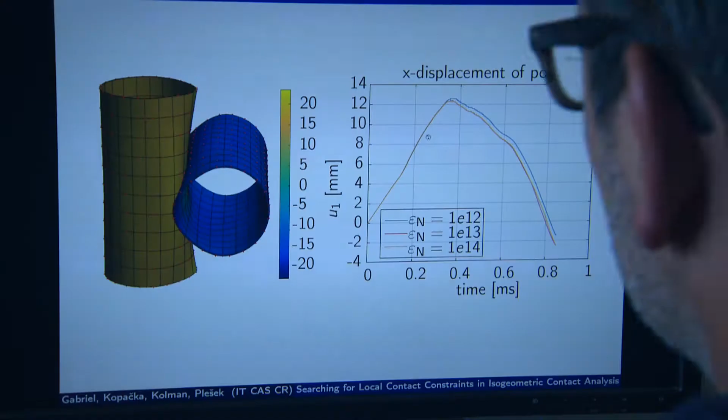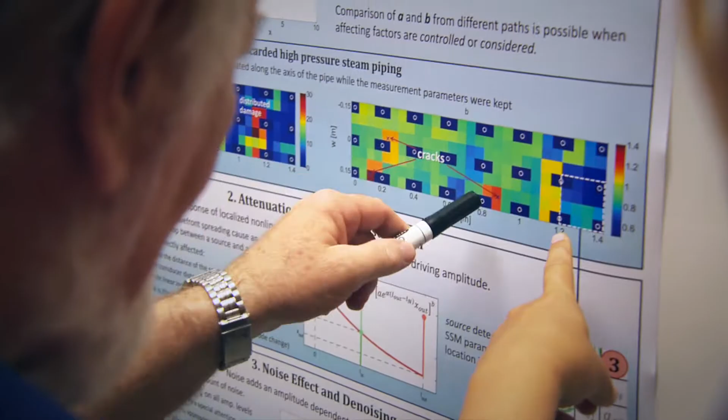The Department of Impact and Waves in Solids studies elastic waves in solids using theoretical, numerical, and experimental methods. Using new methods, we can diagnose materials and structures without damaging or dismantling them. Our aim is to detect the presence and propagation of material defects in time and to prevent failures.

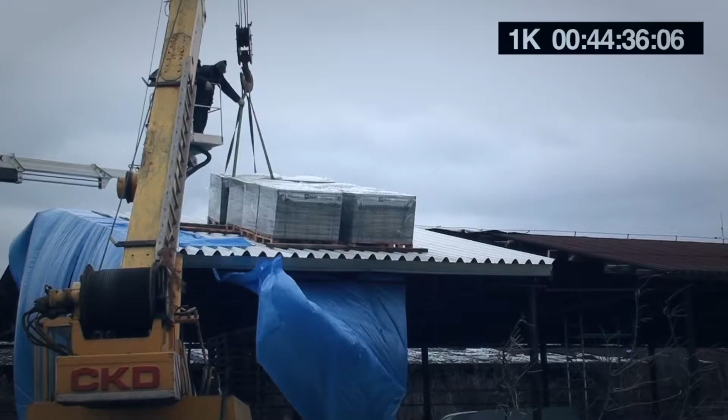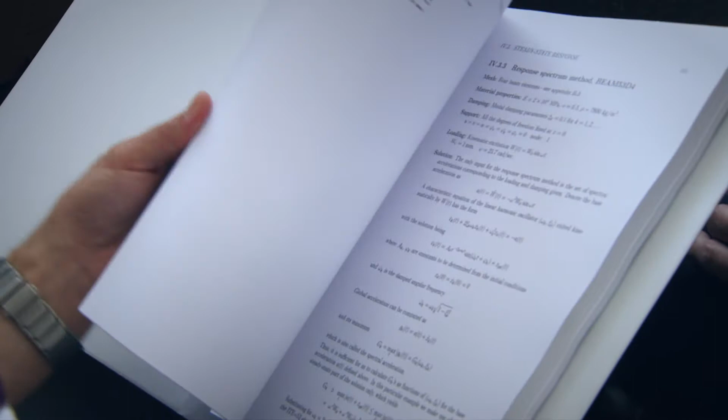The development, implementation and testing of the methods for computer simulation of processes in solids subjected to various types of mechanical or thermal loading are an integral part of our research methodology.

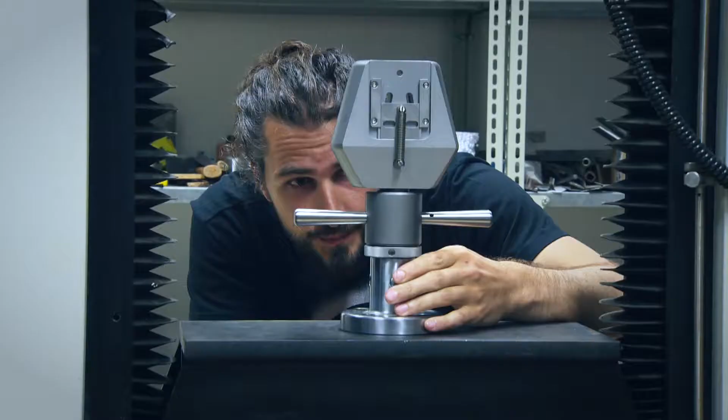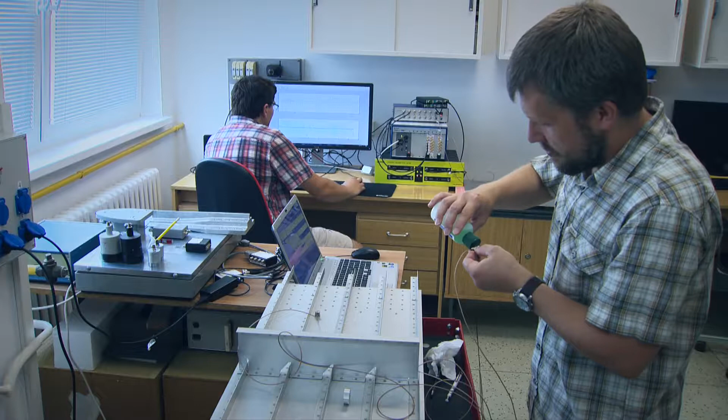Continuous monitoring of structures by the method of acoustic emission helps to detect the initiation and propagation of defects, such as material cracks and leaks from pipes, valves, storage vessels, and other structures. The ongoing damage can be located using piezoelectric sensors and principles of artificial intelligence.

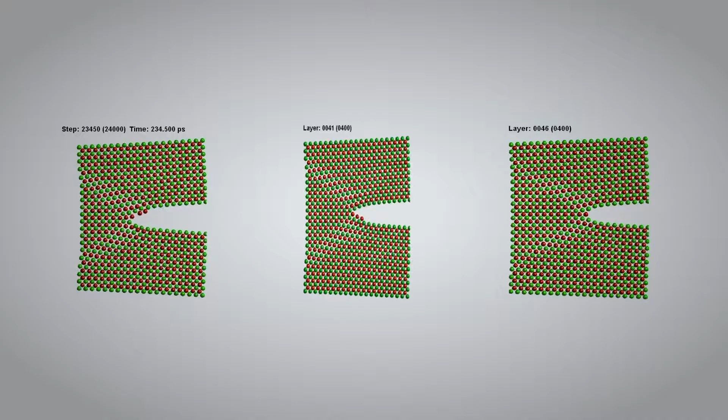Computational methods of molecular dynamics allow us to observe in detail the development of defects at the level of atoms and molecules and to predict the behavior of cracks.

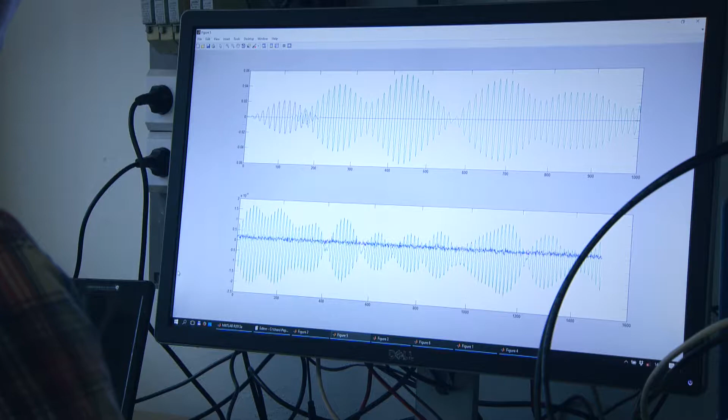The most recent methods of detecting hidden defects in materials include methods of non-linear ultrasound spectroscopy that are up to 1,000 times more sensitive than classical linear methods. The time reversal procedures open up new possibilities of detection of defects and reconstruction of signal sources.

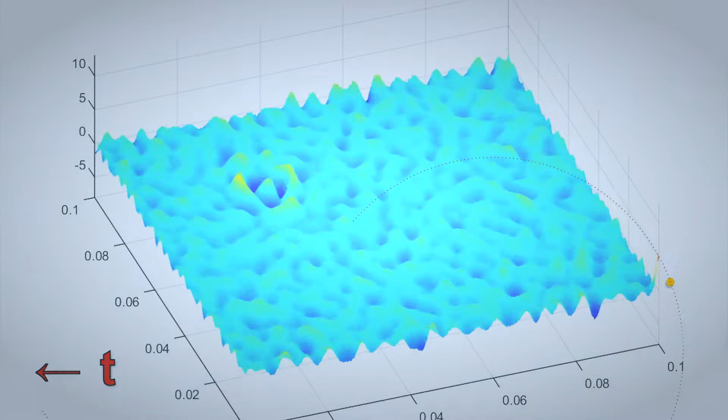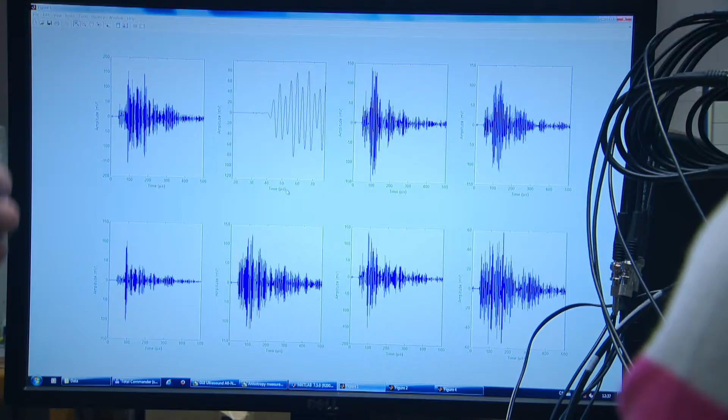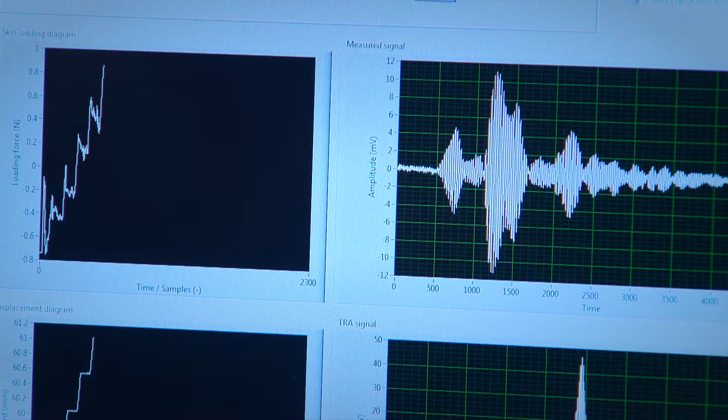We're developing an ultrasonic probe which will allow surgeons to instantly measure the main directions of stress in a particular skin tissue and therefore the most appropriate direction of the incision. Incorrect orientation of an incision can cause complications during healing. The ability of the skin to return to its original state after loading indicates its biological age or current health.

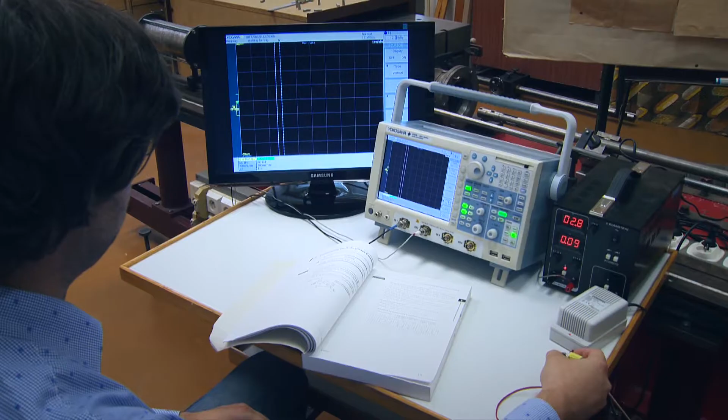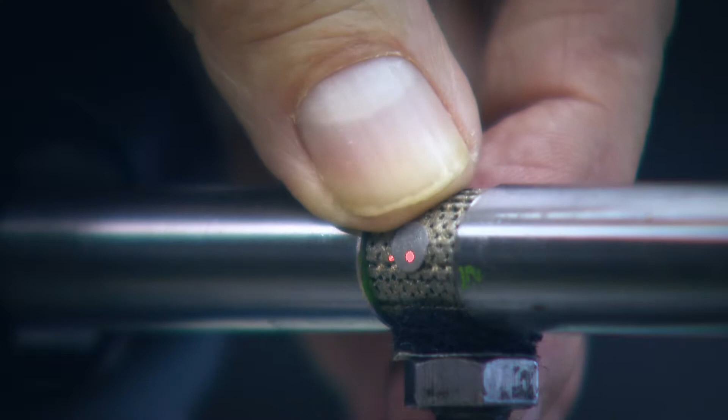The results of dynamic material tests help to shape the use of the materials in many industrial applications. An example may be the dynamic resistance of structural components or biological materials or food during transport.

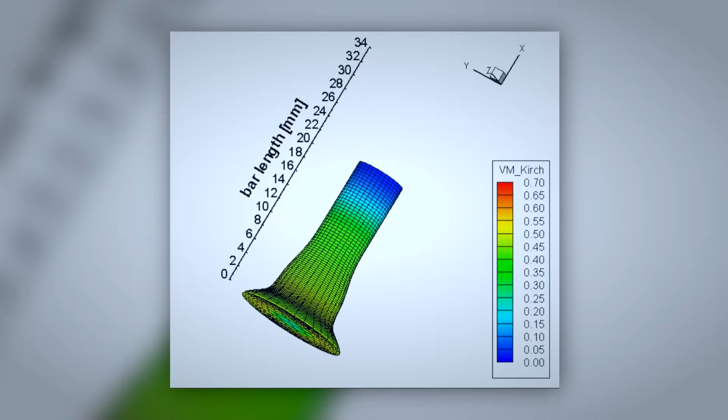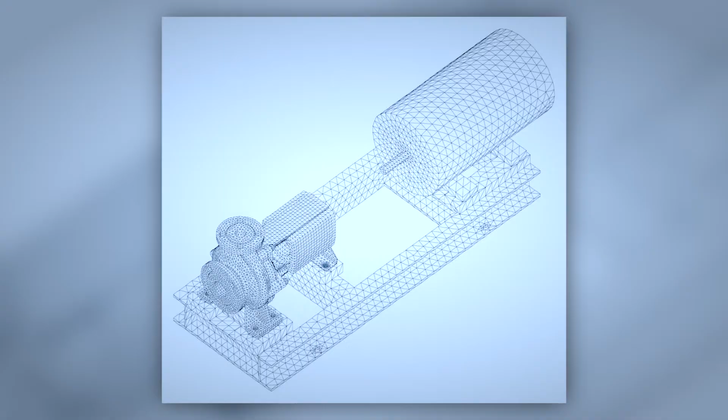Computer simulations are also needed to understand the dynamic deformation processes in detail. Computer simulations are also an important part of designing modern products and devices. Using our in-house software PMD, based on the finite element method and certified by the State Office for Nuclear Safety, we can predict the behavior, properties or service life of mechanical components.

We focus on the problems of the propagation of elastic waves in solids, contact problems in solids, material creep due to long-term high-temperature loading, and the irreversible plastic behavior of metals.